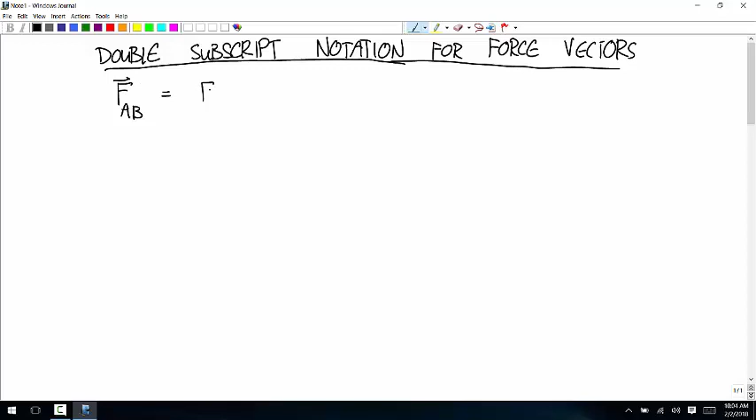I'm always going to use to mean the force on A by B. And it's sort of a pain that there's not a universal way of ordering those. I think physics people more often say FAB is the force by A on B. Engineering people more often say FAB is the force on A by B. But this is how I'm going to use it.

When in doubt, you can always just write stuff out: A by B or something like that. You can make your subscript a paragraph long if you want. But when I say FAB, I'm going to always mean the force on A by B.

Okay, say it with me. On A by B. On A by B. On A by B. Okay, good. You're like reciting it, and you're the only one saying it. The whole class just keeps their mouth shut. I knew Peter would do it.

I didn't. If I would have started somewhere else, I would have been less confident that it would have spread around the class. Like, look at somebody and they're just...

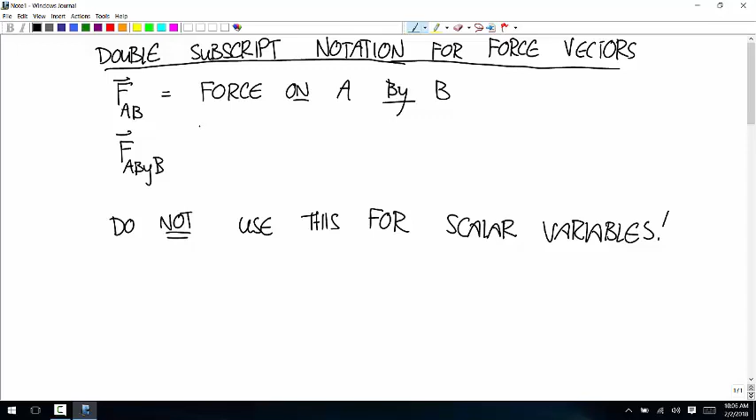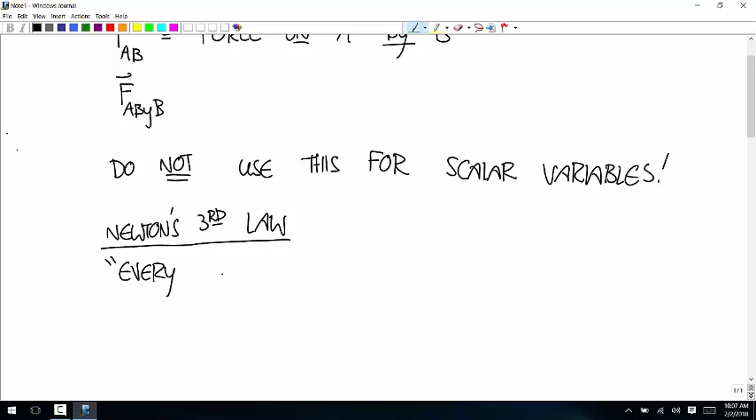And now the main reason that this is useful is Newton's third law. Newton's third law is the one that says for every action there's an equal and opposite reaction. Yeah, it's a good law.

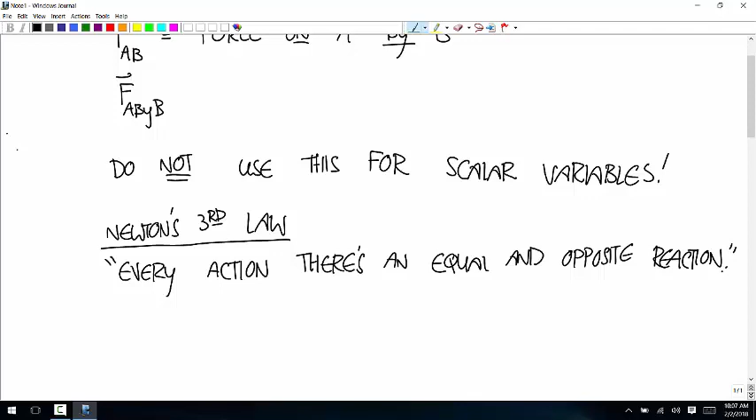And there's two ways that we'll use this. This is not either one of the ways that we're going to use it. That's a very confusing, so that's like translated to modern English, like Newton's original wording. Was it in Latin? Yeah. Okay, then yes, it's in Principia, yeah.

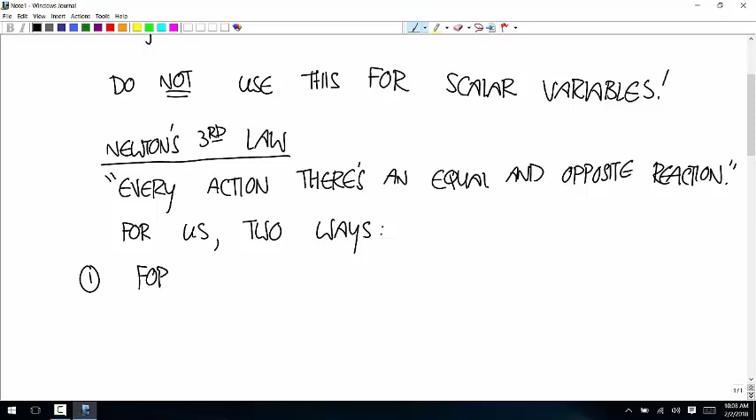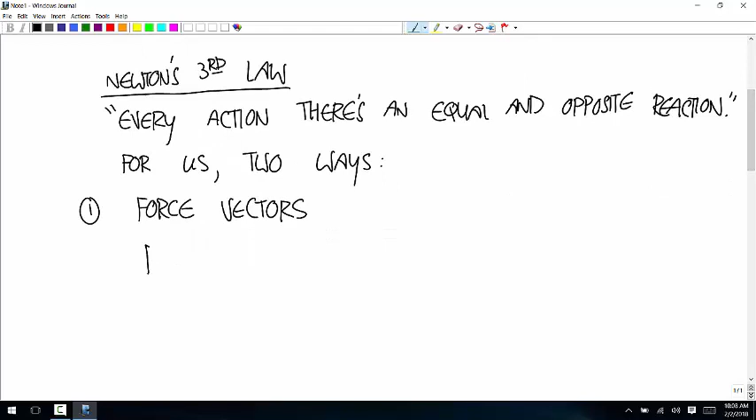So for us, this comes up two ways. The first one is force vectors. And for force vectors,

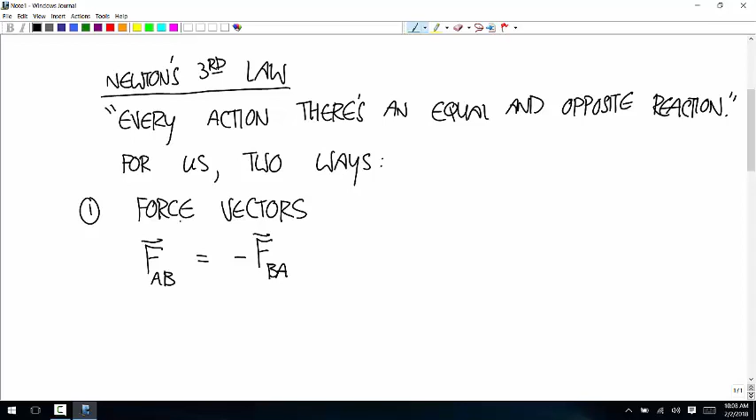FAB vector is negative FBA. That's why that subscript notation is cool. It's just so nice and concise. There's no way to get that wrong. If you have a contact force between A and B, and you flip which one you're looking at, you flip the sign of the vector, flip the direction of the vector.

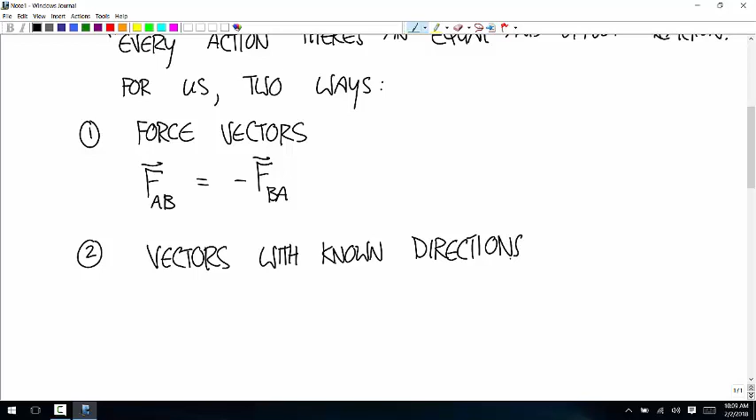The other way is for vectors with known directions. So in that case, let's say we have a body A and a body B in contact. And so a free body diagram of A looks like this. And a free body diagram of B looks like this.

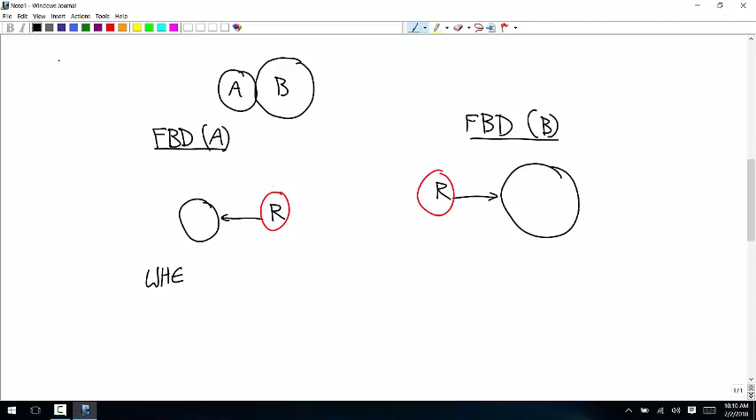So R is not going to use that double subscript notation, but this is the same variable. So if you have subscripts on that, then they're the same. So when you switch bodies, switch the arrow and keep the variable the same, or keep the label the same.

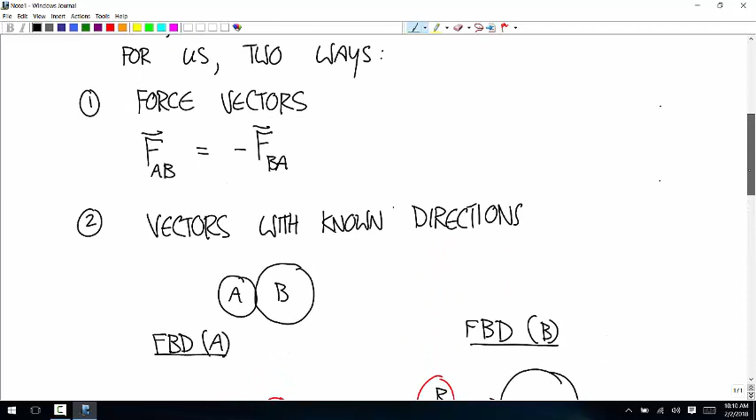Okay, so could you find room over here by the force vectors?

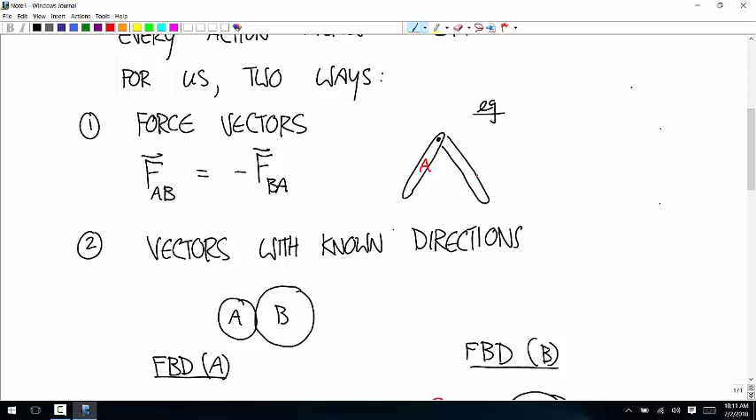As an example, if you have these two bodies connected by a pin joint, that's body A, that's body B, then the free body diagram of A looks like force on A by B, and the free body diagram of B - this force would be the force on B by A, so FBA, and that's the negative of FAB. Any questions about that? Can we choose our own direction?

Oh yeah, so the directions of those axes should be whatever your coordinate system is in that problem. So if you choose a rotated coordinate system, just draw those at the angle you chose. That's supposed to indicate this is just shorthand for saying we have an x coordinate in one direction and a y coordinate in the other. If you want the x-axis pointing up and the y going right, yeah - if you have a different coordinate system, use the coordinate system you're using in the problem.

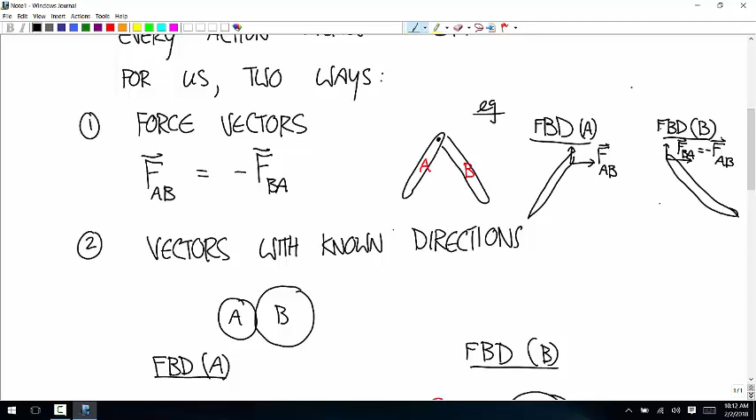Okay, so we talked about what to do if you have forces with known directions. So far we haven't talked about when you know the force direction. Here are the 3 types, I believe, that we'll have: 3 forces with known directions.

The first one is a pushing force. The second is a pulling force, and usually that's going to involve cables, but it doesn't have to. And the third one, which I can't think of any problems where we use this in this class, is the friction force.

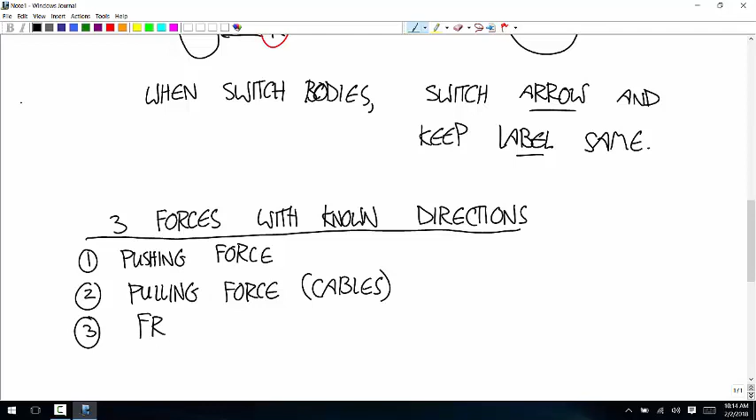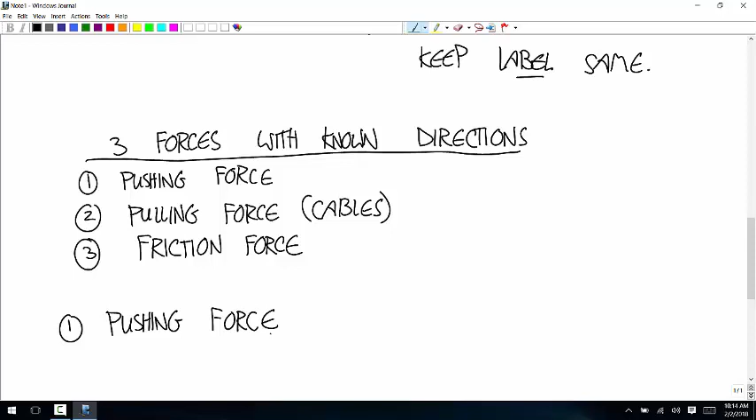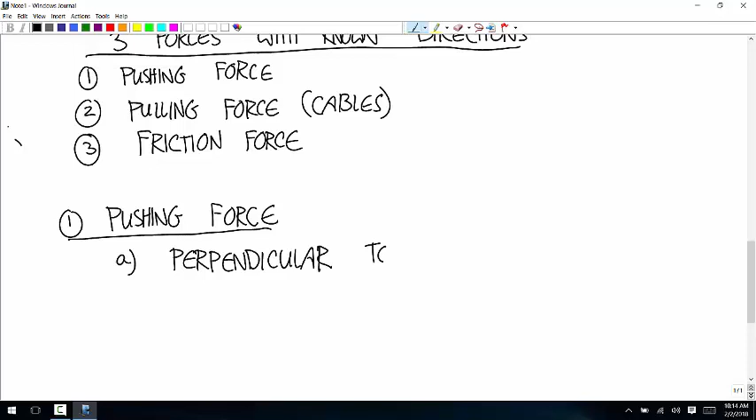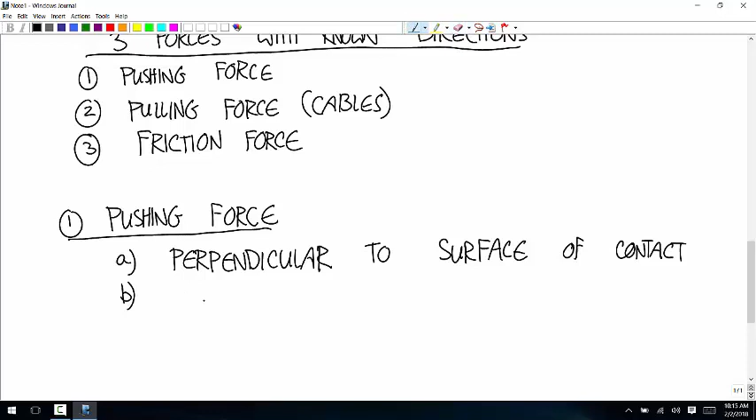Okay, so first is a pushing force. A pushing force is always perpendicular to the surface of contact, and it's always toward the chosen body. Think about it this way: if your shirt's hanging out and someone pushes on you, which direction does your shirt go? It goes toward you, if you're the chosen body.

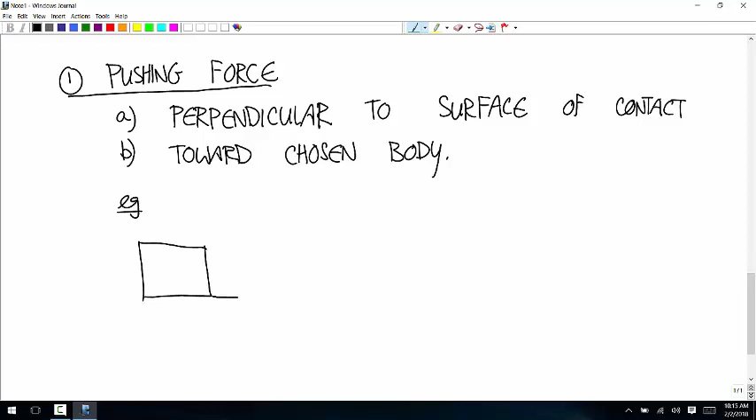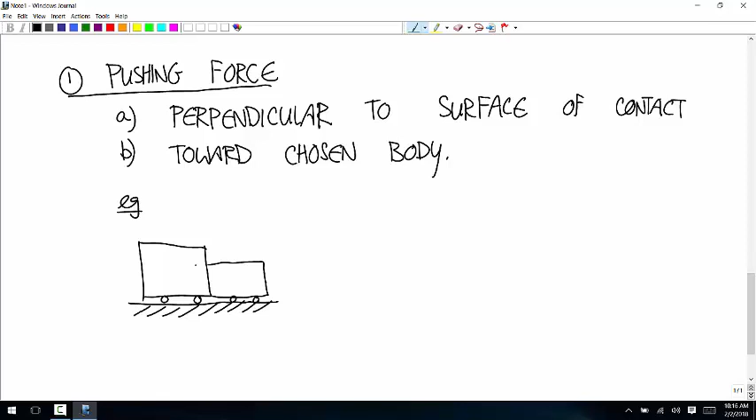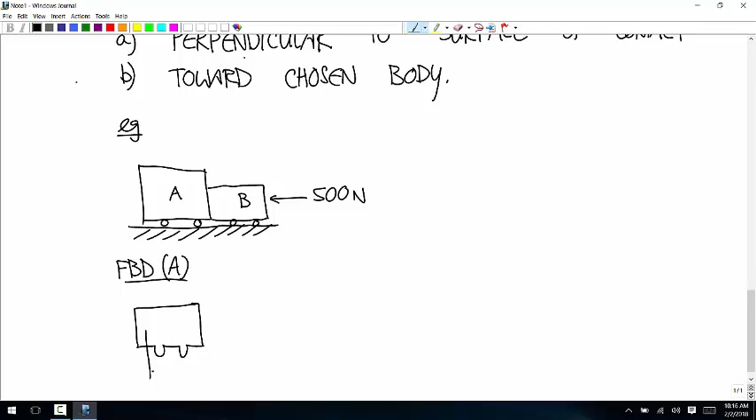So as an example, if you have 2 objects on rollers - I'll call this one A and this one B - and you have a force of 500 newtons pushing on body B. A free body diagram of A: there'd be a weight force, call that mAg. And then the ground is pushing on the wheels, so that's this way, I'll call that normal A. And then cart B is pushing on A, so that's a force this way, and I'll call that R.

Yeah, that's mg - the mass of A times g. And I didn't use the double subscript notation because we know the direction. This is where you can get into trouble if you treat that scalar with the double subscript notation - you can get yourself mixed up. I'll show you why in a second.

And then the free body diagram for B: we have the weight mb times g, we have an upward force I'll call normal B, and then the force applied to B by A. Newton's third law says we draw the arrow in the opposite direction and keep the exact same label.

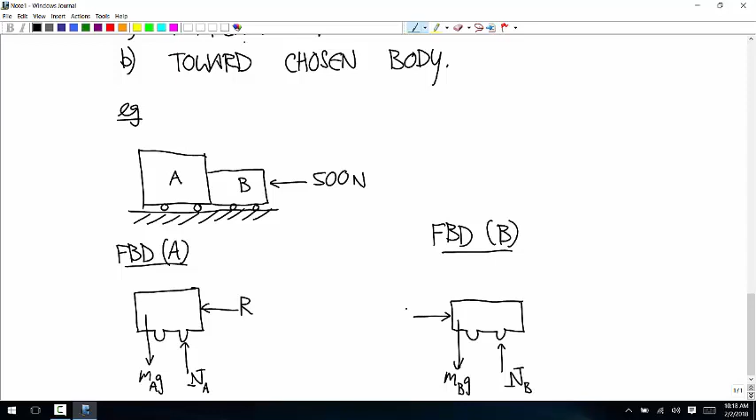So you'd get into trouble with the subscript notation potentially here if you wrote this as FAB with the arrow going that way, then drew this arrow going the other way and wrote it as FBA, negative FAB. You switch the arrows and use that subscript rule, and you end up with a double negative, which means both forces are going in the same direction and your answer is wrong. That's why you don't want to use that double subscript notation for scalars - it's because a scalar is always associated with extra information that comes from the direction of the arrow.

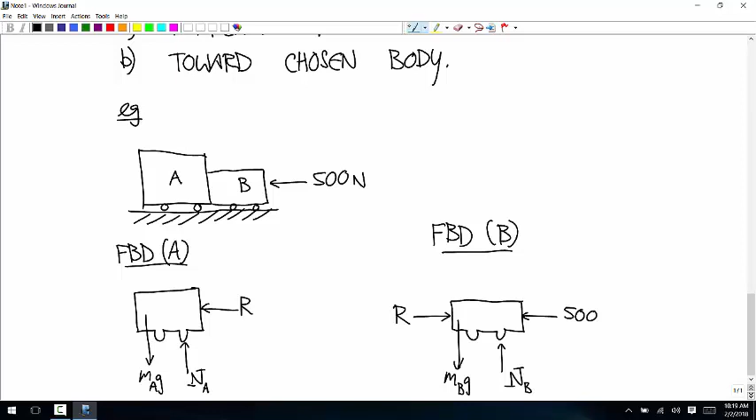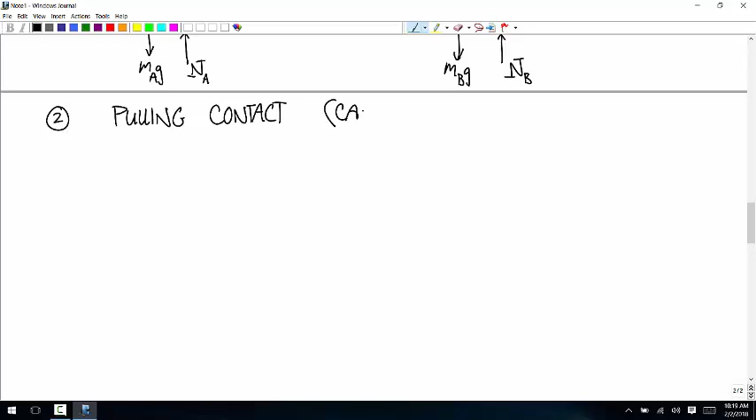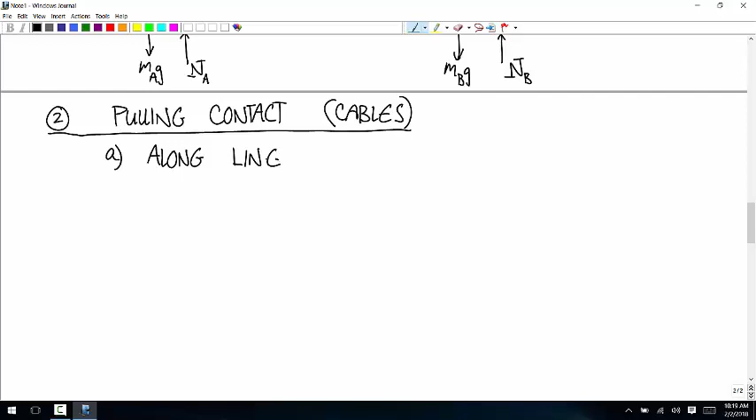The second type of force is a pulling contact, usually involving cables. And the rule for those is the force is along the line of the pull. Maybe it's sort of redundant, but if you're talking about cables, that means parallel to the cable.

And away from the chosen body. Again, you can make sense of that just with a shirt or whatever. If you pull on something, you can see that force is pulling your shirt away from the body. That's the direction of the force that's applied.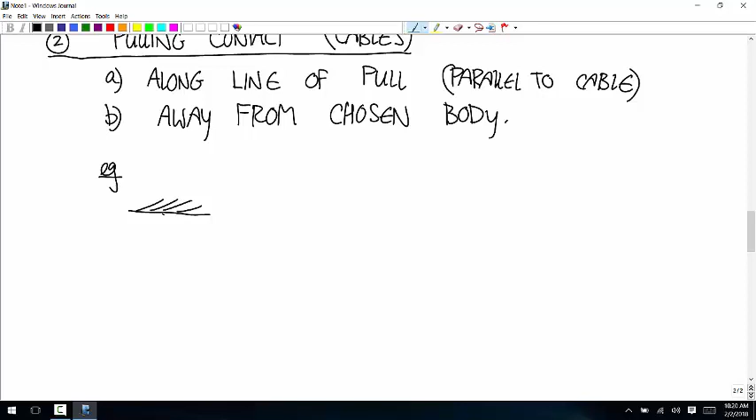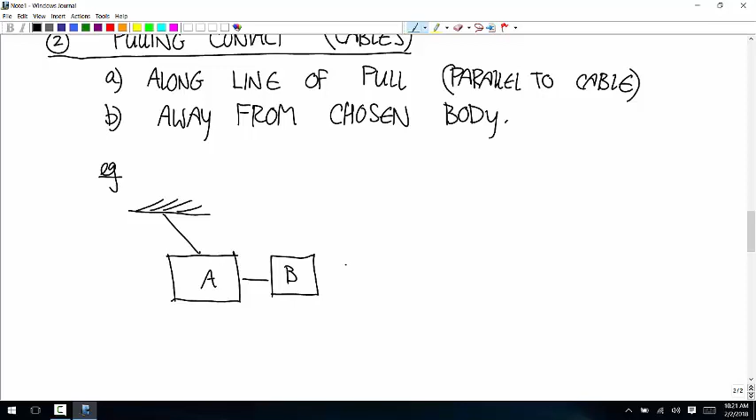So for example, let's say there's a cable there, an object A, another cable connecting it to an object B, and a force of 200 newtons.

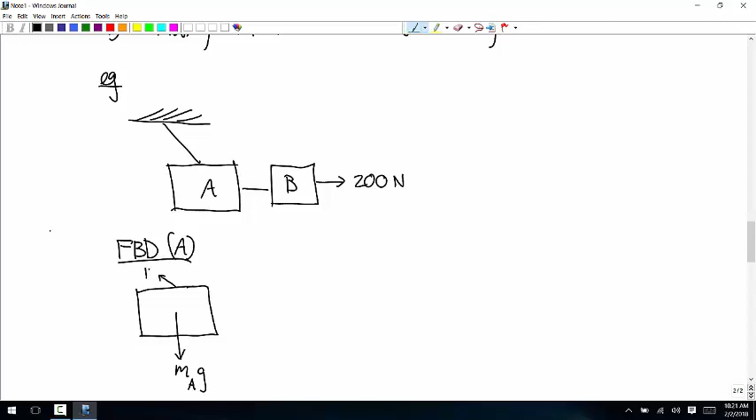So the free body diagram of body A. There's the weight, mAg. There's a cable force here that's away from the chosen body. Call that T1. And this cable applies a force away from the body. I'll call that T2.

And then a free body diagram of B. That cable's pulling away from B. That's the same cable as in the other free body diagram, so it has the same magnitude, but the force is in a different direction because it's always away from the body. So this is still T2. We have the weight mBg, and then the force of 200.

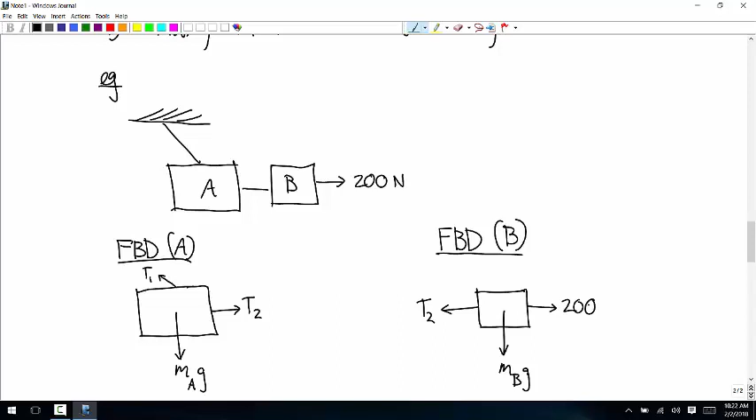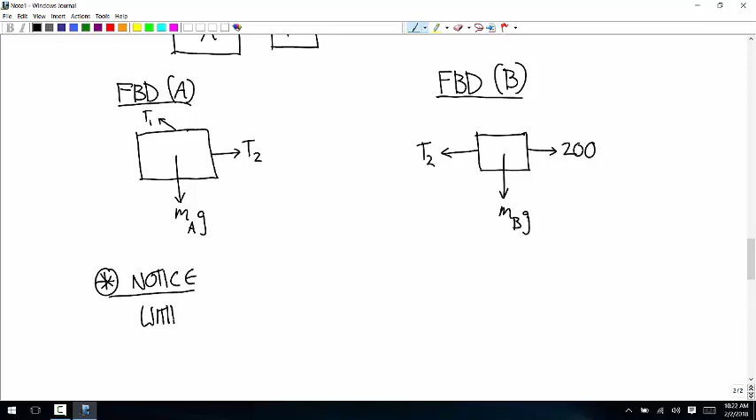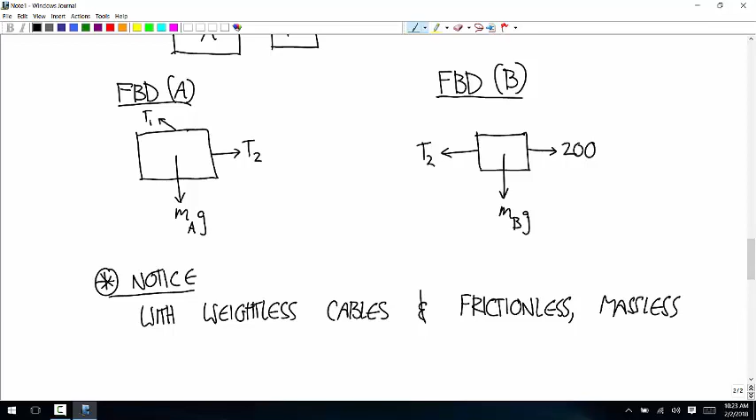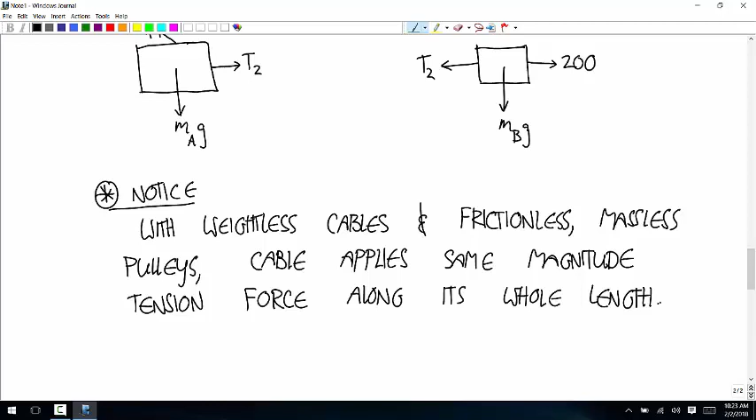A lot of times, if you're using cables, there's some kind of pulley being used also. So notice: with weightless cables and frictionless, massless pulleys, a cable applies the same magnitude tension force along its whole length. The direction can change when there are pulleys, but that's the only thing that changes.

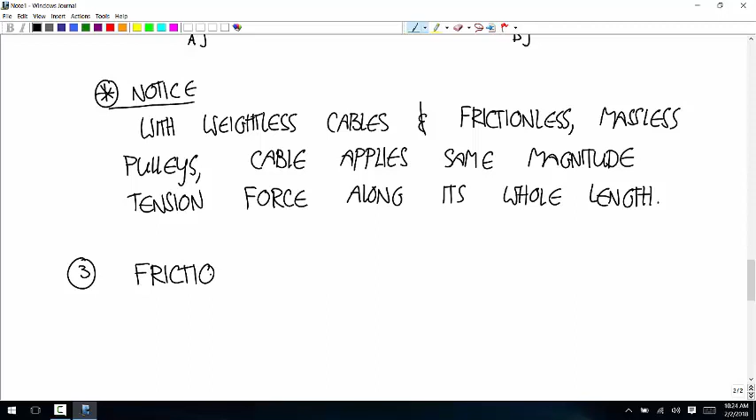And then the last type of force with a known direction is friction. Let me say that what we're talking about here is dry friction, the kind of friction that you talked about in Physics 1.

By the way, when is it reasonable to use the idea of dry friction in a problem? If you're using some kind of graphite lubrication, or lube, it's okay to use the rules of dry friction — you're just reducing the coefficient of friction. If you're using oil or something, and you're going to get significant effects of the viscosity of the oil, then you have to bring other equations into it that we're not talking about here that come from fluid dynamics.

So bearing, well, ball bearings, I suppose it depends on the size of the ball bearings. If they're big enough compared to the other stuff going on, then you're going to have to deal with the inertial effects of the bearing, just like you would a wheel or something. If they're small and there's not very many of them, then I suppose this would work — I guess it depends. If you're assuming rolling without slipping between the things and the bearings, you probably would just model the rolling in there; it wouldn't add so much to the problem. Dry friction would really only come about if the thing is sliding across the ball bearings, which isn't really what you want anyways.

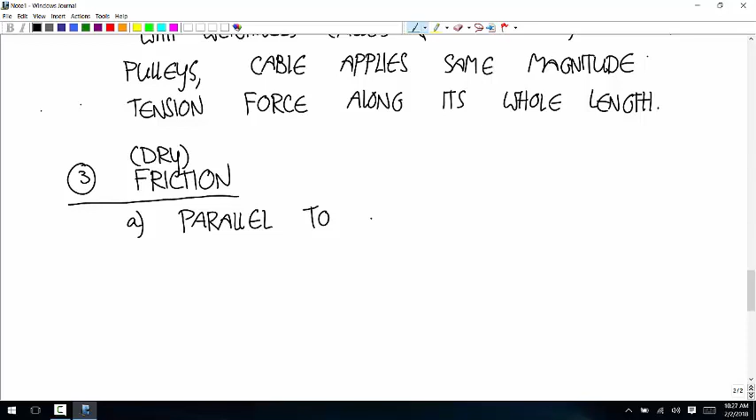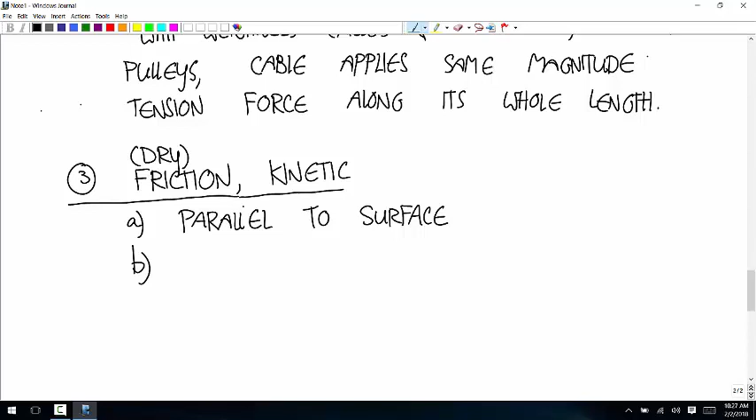Okay, so first, this is parallel to the surface. And second, I'm going to break this up into — what I have here is kinetic friction. So it's parallel to the surface, and it's opposite the chosen body's velocity.

And really what matters here is the relative velocity of whatever it's sliding on. It's not an absolute thing. If you have a thing in a truck that's going 50 miles an hour this way, and a thing in the flatbed is sliding this way on the truck, the 50 miles per hour doesn't matter for the friction — what matters is the direction of the slide. So this is relative to the surface.

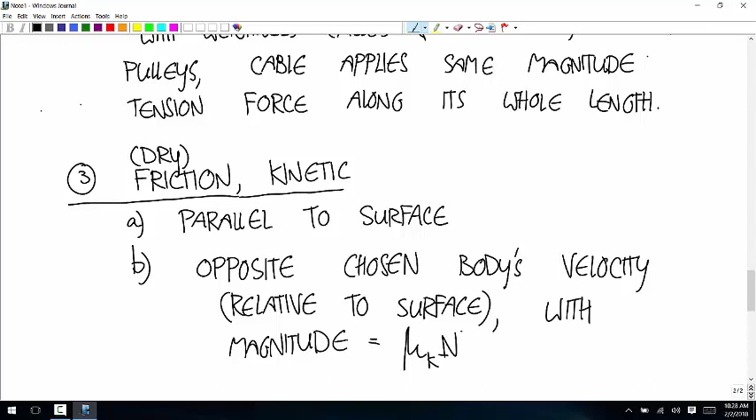And we also know the magnitude is the coefficient times the normal force.

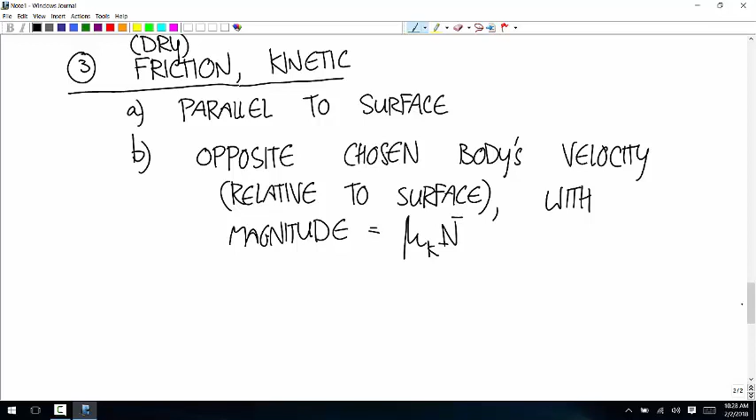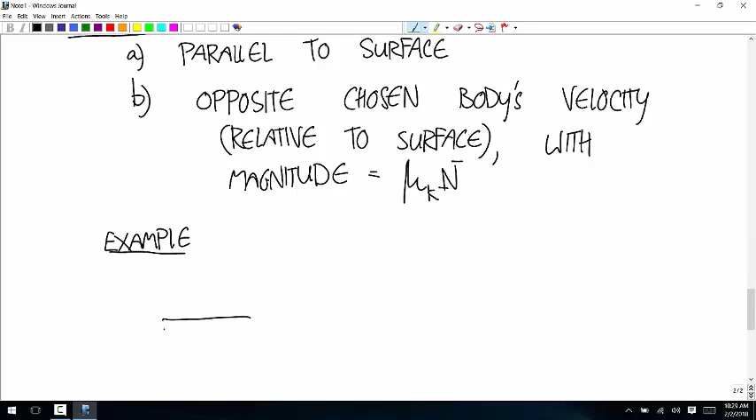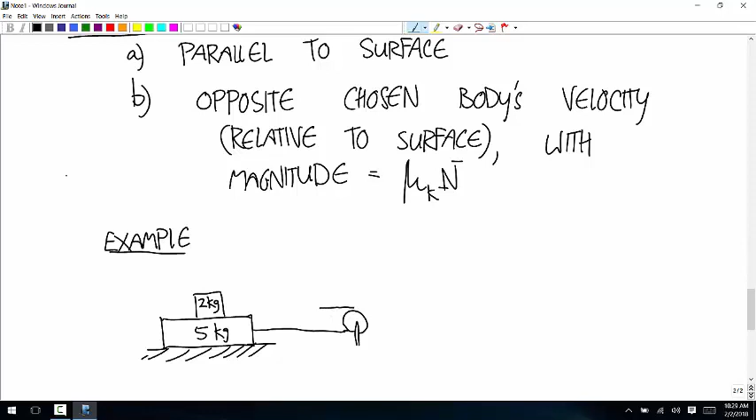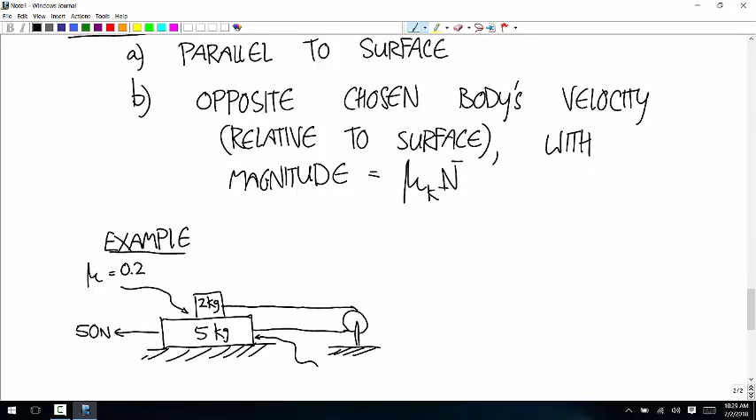Okay, so let's say we have a setup like this. We have one object that's sliding along the floor — say that's 5 kilograms. And then we have a 2 kilogram object sitting on top of it, sliding relative to it. And these are connected by a pulley. There's a 50 Newton force pulling that way. And let's say that the coefficient of friction at that surface is 0.2, and the coefficient of friction at that surface is 0.3. And we want to draw free body diagrams.

So first, the free body diagram of the 2 kilogram box. We have a weight force of 2 times 9.81, so 19.62. We have a pushing contact applied by the 5 kilogram box, so I'll call that N1.

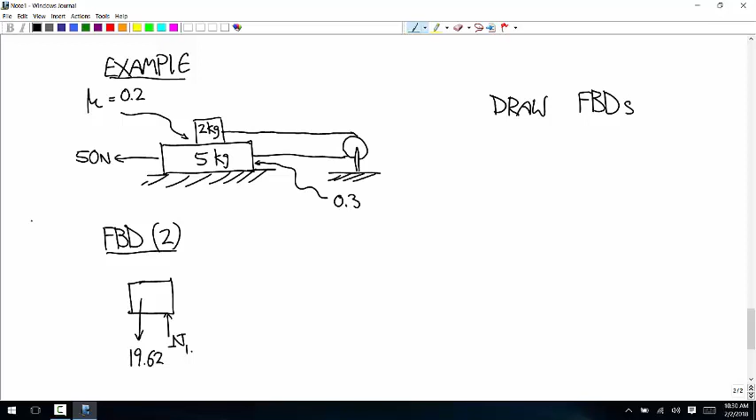And then which way is the 2 kilogram... well, let me do the cable tension. Okay, so that's everything except the friction force.

So now we have to think about the friction force. Which way is the 2 kilogram box sliding relative to the surface? To the right, yep. And so the friction force is going to be to the left. That's going to be equal to the coefficient between those two surfaces, that's 0.2, times the normal force that's pushing those two together, so that's N1.

And then a free body diagram of the 5 kilogram. We have the weight, 5 times 9.81 is 49.05.

We have a normal force, I'll call that N2, that's the pushing force from the ground. We have a cable force this way, it's the same cable as in this case, so T. We have a 50 Newton force this way. We have a pushing force from the 2 kilogram box, that's this direction. You can also just think of that as a Newton's third law thing.

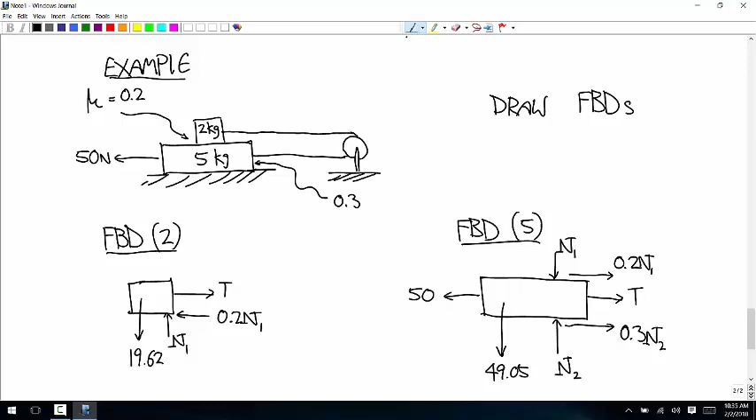And variables, we have 1, 2, 3. That's all, right? 1, 2, 3, 4, 5, 6, 7, 8, 9. Yeah, there's only 3. Only 3. Okay, so I guess one of those equations, I'm not sure which one, is just going to be redundant. Oh, no.

We have 4 equations. And what's the 4th variable that I'm missing? 4 variables. So the ones here are T, N1, N2, and then when we go to Newton's second law, we'll also have an acceleration.

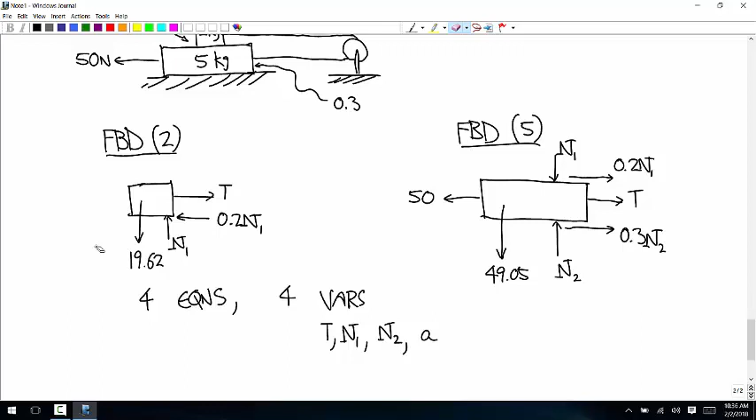Okay, so let's just do... let's solve this one. Okay, solve it.

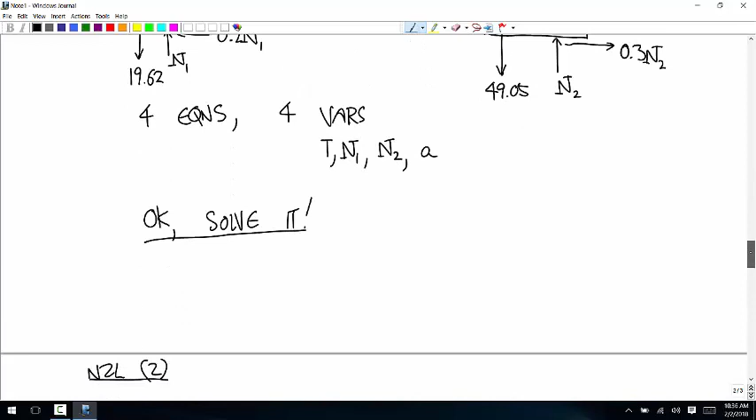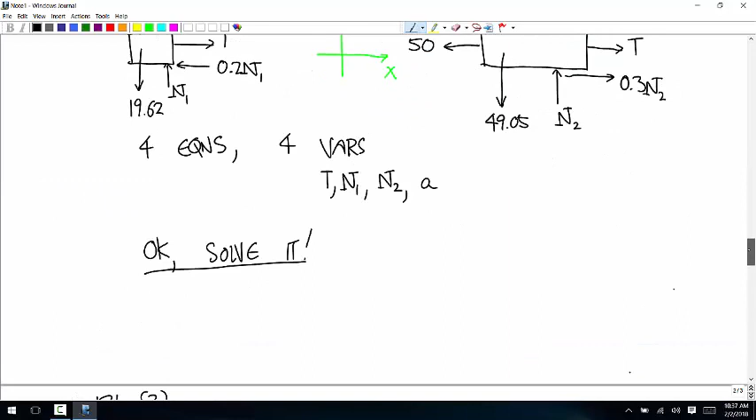So Newton's second law for the 2 kilogram box. I'll use a coordinate system like this, x and y. For the 2 kilogram box, we have the force T, 0. We have the weight, 0, negative 19.62. We have the normal force, 0 and N1. We have the friction force, that's negative 0.2 N1, 0.

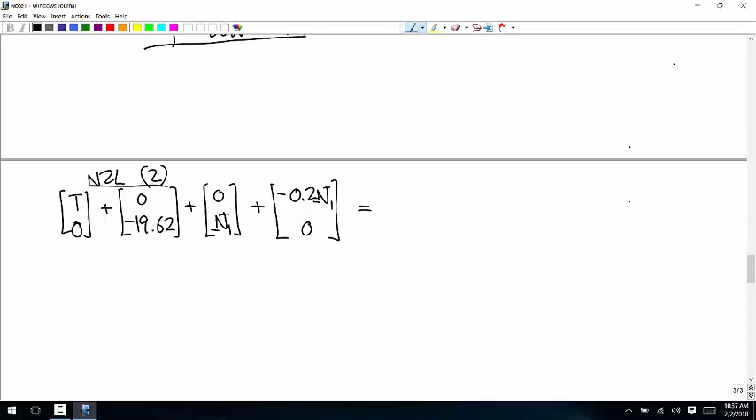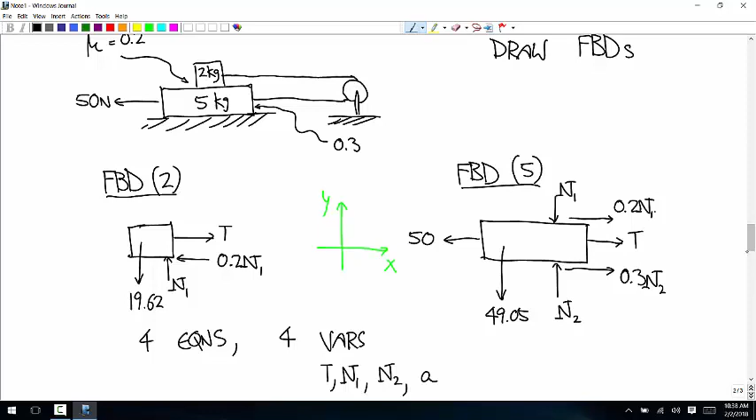And all those add up to equal the acceleration, so that's the mass of the box, 2 times... is there anything we know about the acceleration? Do we know anything about its direction? Well, we don't know whether it's going to be accelerating this way or that way. There's things going in both ways, but we know it's going to be parallel to x. So I'm just going to write this as a2, 0, and the signs will come out on their own.

And then Newton's second law for the 5 kilogram. We have the force negative 50, 0.

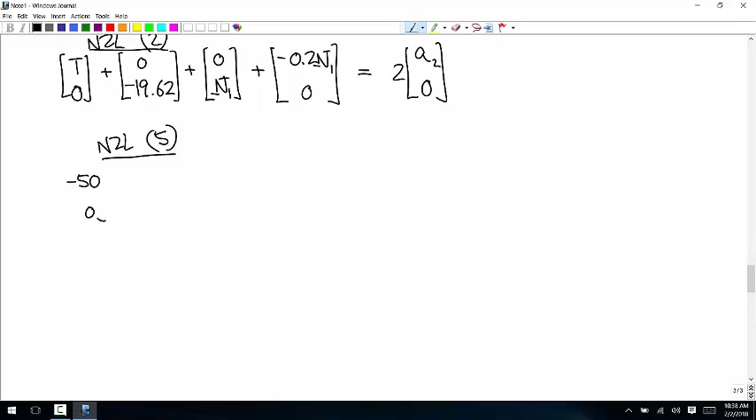We have the weight, so 0, negative 49.05. We have the normal force N2 up and the normal force N1 down. So plus 0 N2, plus 0 negative N1.

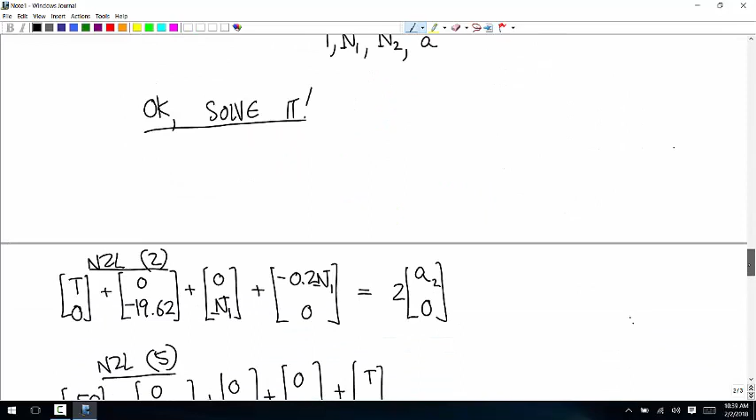We have the cable force T0. And then we have the 2 friction forces, 0.3 N2, 0, and 0.2 N1, 0.

What do we know about this acceleration? So that's also going to be in the x direction. I'm going to call that A5, 0. Okay, so we have 4 equations here. Let's count the variables again. We have 1, 2, 3, 4, 5.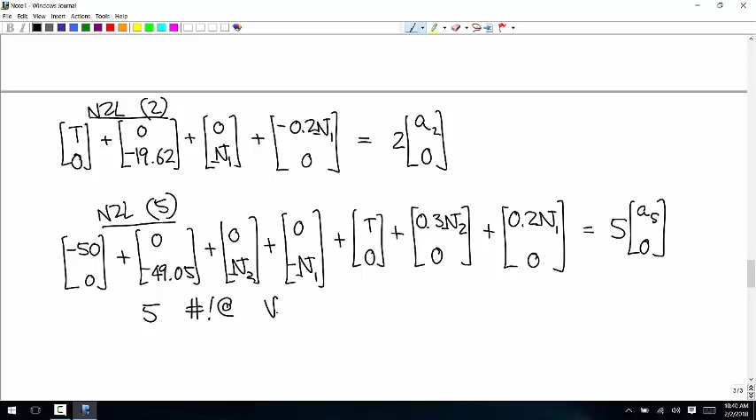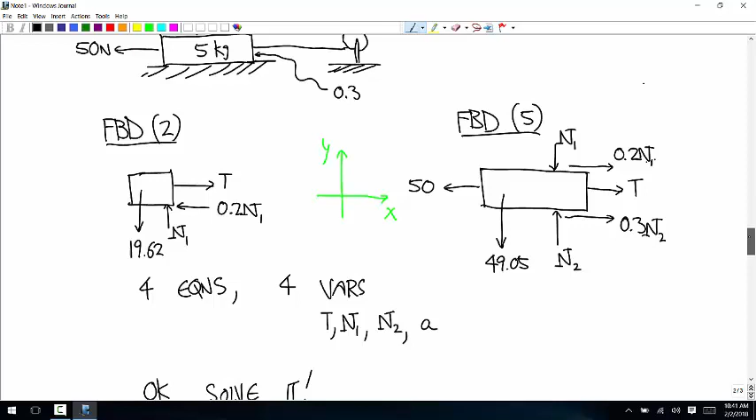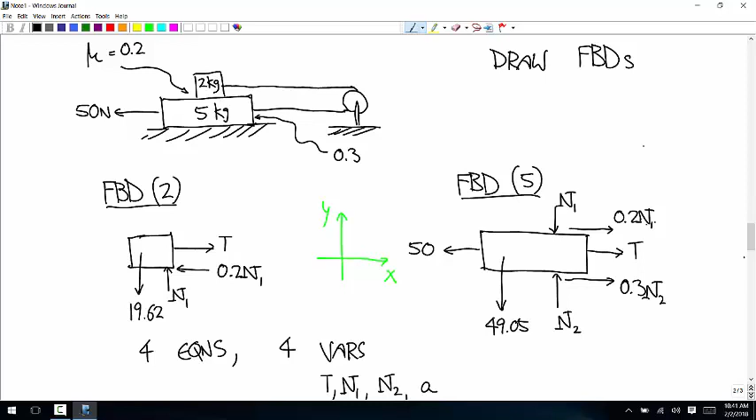Okay, so, but there's one more thing, because that cable is inextensible, we know there's a relationship between those 2 accelerations. You can always figure out what that is by thinking about what happens when the position changes. So think about this position moving an inch that way. What happens to this one? It moves an inch the other way. So the fact that the magnitudes of those displacements are the same means the magnitudes of the velocities will be the same, accelerations will be the same.

And since they're in opposite directions, we can say that A5 is negative A2. And so you can substitute that in, or you can just use it as a 5th equation.

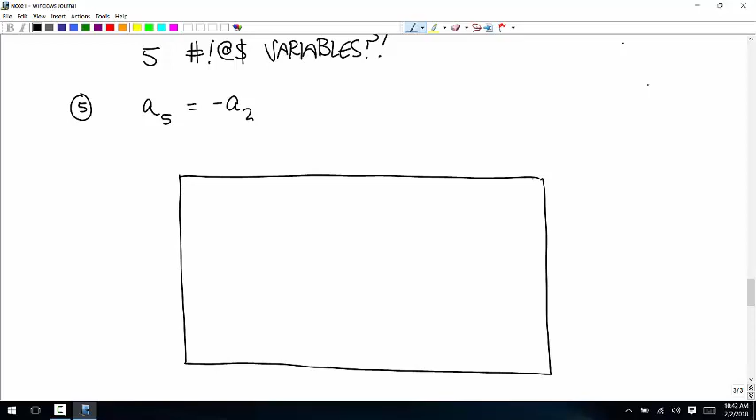Okay, so how are we going to solve this system? Yeah, the easiest way to do it, in my opinion, is in your calculator: list out all the variables.

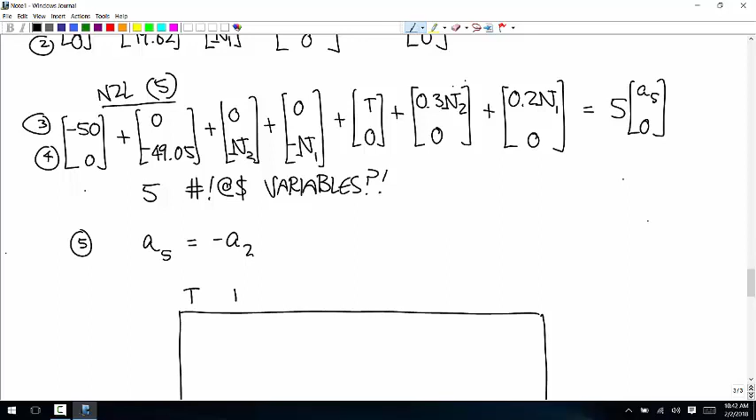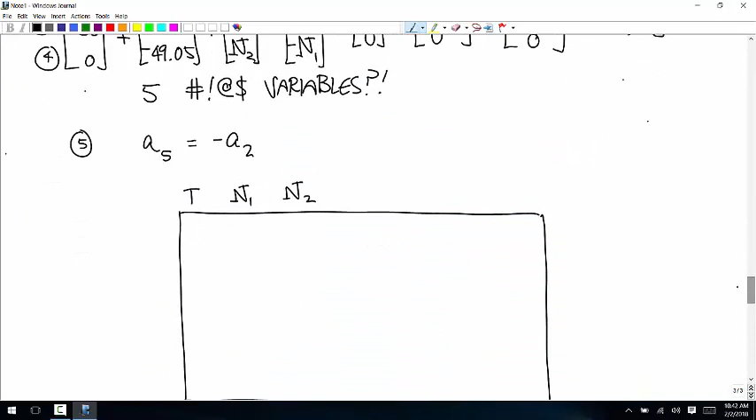So let's call them T, N1, N2, A2, A5, and then each one of these is a column. So this is the constant. And we're going to express each one of these, and the rows are going to be the different equations. So there's equation 1, 2, 3, 4, 5.

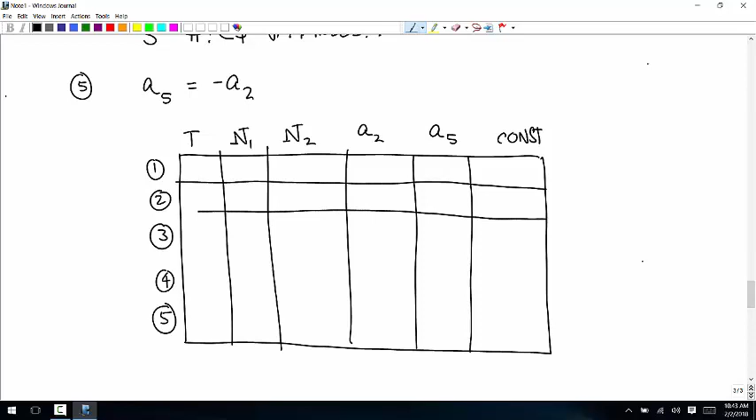And for each one of those equations, we're going to get any constants by themselves on the right side, and we're just going to write down the coefficients for those variables. This is the augmented matrix if you've used reduced row echelon form before.

So for equation 1, the coefficient of T is 1. The coefficient of N1 is negative 0.2. The coefficient of A2 is, we have to get that over on the left side of the equation, all the variables on the left and all the constants on the right. So that's going to be negative 2. And everything else is 0.

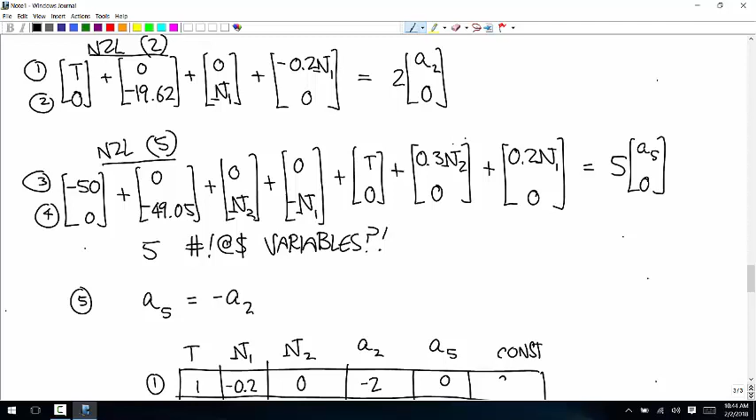Equation 2, the coefficient for N1 is 1. The constant, once you get it alone on the right side, is positive 19.62. Everything else is 0.

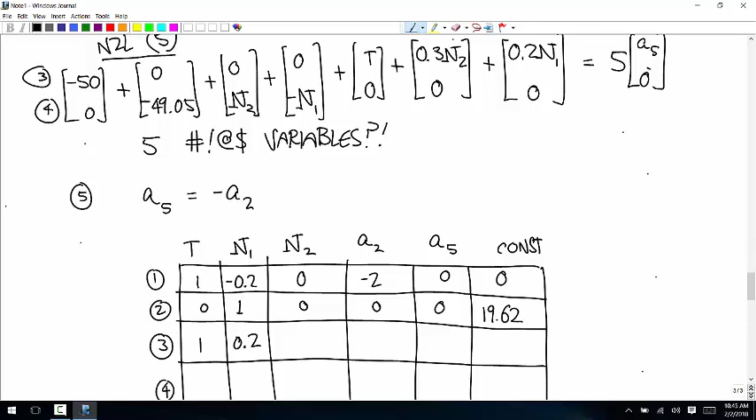Equation 3, the coefficient for T is 1. The coefficient for N1 is 0.2. For N2 is 0.3. For A5, get that on the left side, and that's negative 5. And then the constant is positive 50 when you get that alone on the right side.

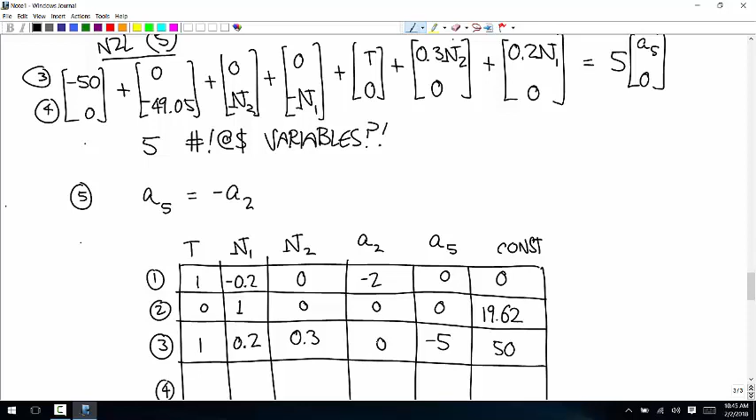Then the fourth equation, the coefficient for N1 is negative 1. For N2 is positive 1. The constant is positive 49.05.

And then our last equation, the coefficient for A2, when you get it on the left side, is 1. For A5 is 1, and everything else is 0.

So if you call that matrix with a size of 5 by 6, call it, say, M in your calculator, and then run reduced row echelon form of M, it'll give you this matrix back. It'll be 1, 0, 0, 0, 0, and then 0, 1, 0, 0, 0. I'm going to fill in the last column last. Then 0, 0, 1, 0, 0. So that 1 just keeps moving along the main diagonal.

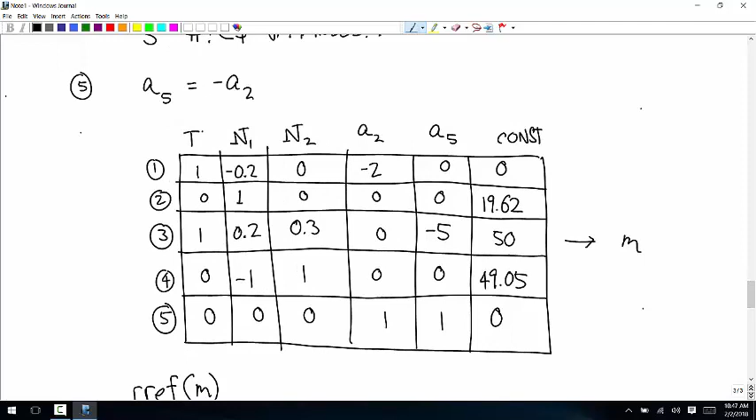And I think what you get is, when you run reduced row echelon form, it'll give you the answers in the order that you listed the variables. So our order is T, N1, N2, A2, A5.

So T will give you, I think, 18.49. I think I used all the same stuff. So 18.49. N2 is 68.67.

Which one is? All of them are different? No, the 68.67 is the same, but yeah, that's what it should be. Yes, 68.6. Is that what you got? Okay.

10.08. I think I might have changed that force. And then this one is 19.62.

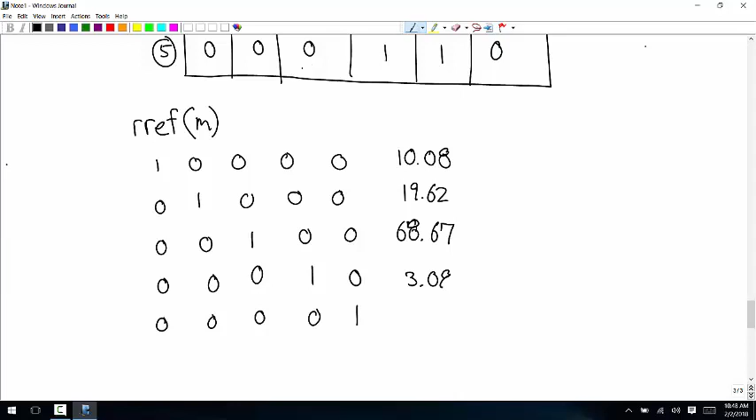And then what did you get for the acceleration? Okay. So this is the tension. N1, N2, A2, A5.

Any questions about that?

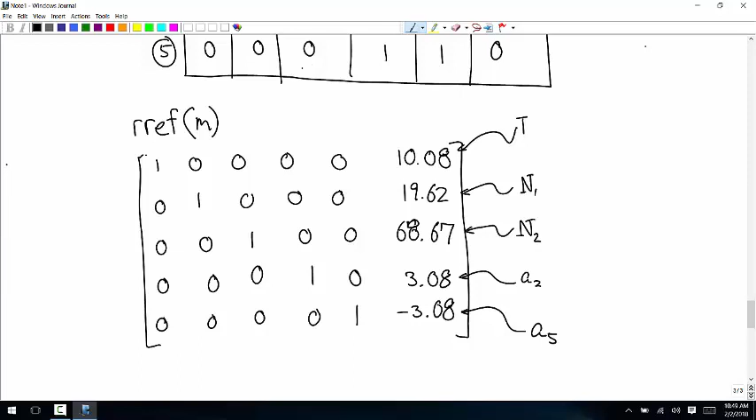Oh, come on. You want to learn this. This stuff is cool, isn't it? I mean,